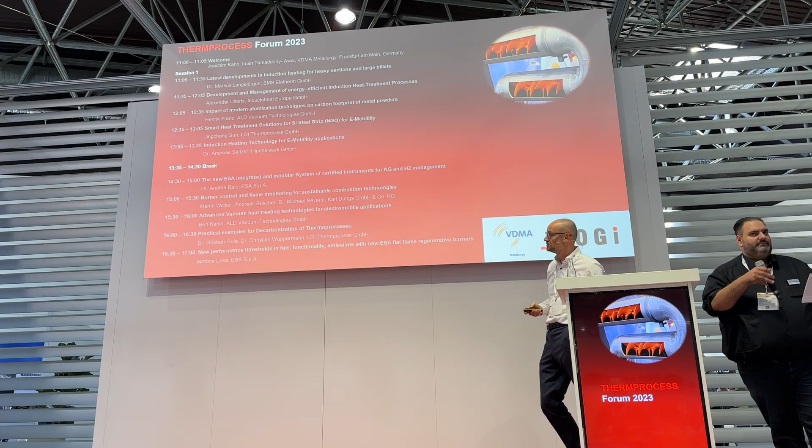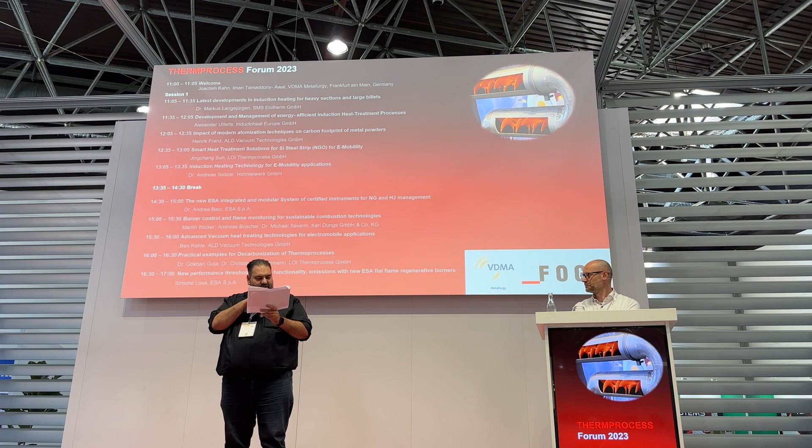Hello everyone, welcome back after our short break. And we continue with the second part of our symposium here. Our next speaker is Dr. Baio from ESA, Technical Department Manager R&D at ESA in Bergamo, Italy. He will hold a presentation about the new ESA integrated and modular system of certified instruments for NG and H2 management. You're welcome. Thank you very much.

So, I introduce myself a little. I'm the R&D and Technical Manager for ESA Pyronics. ESA is a company that is located near Milan. We are roughly 30, 40 kilometers from Milan. We are a combustion system provider. So, we can divide our production into parts. One is the equipment and one is the engineering.

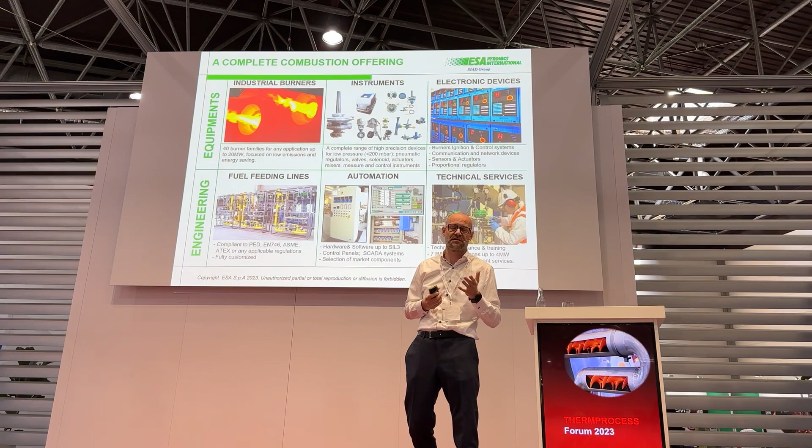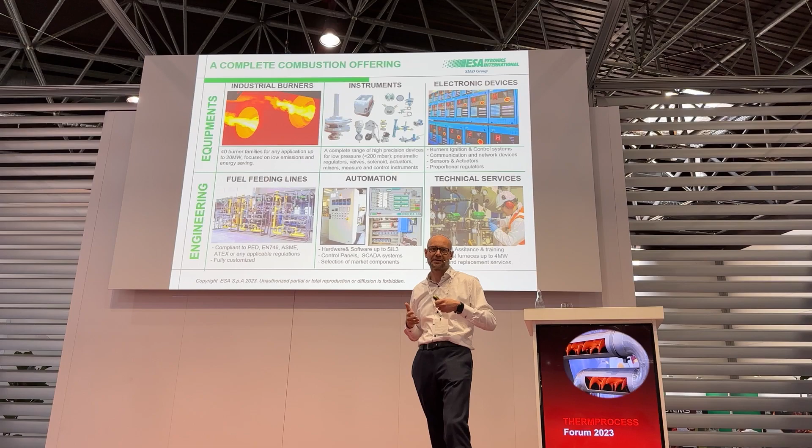We make a lot of equipment, devices that are used for the control of combustion of burners. Our core business is burners. We are a burner manufacturer. We make roughly 40 families of burners with different sizes. So you can imagine how many burners we developed in the past and how many burners we have in the catalog. From low temperature applications, bakery systems, 250 degrees, 300 degrees, up to 1500 degrees, so glass industries, for example. We are in all the fields of combustion except boilers. It's the only field that we don't cover.

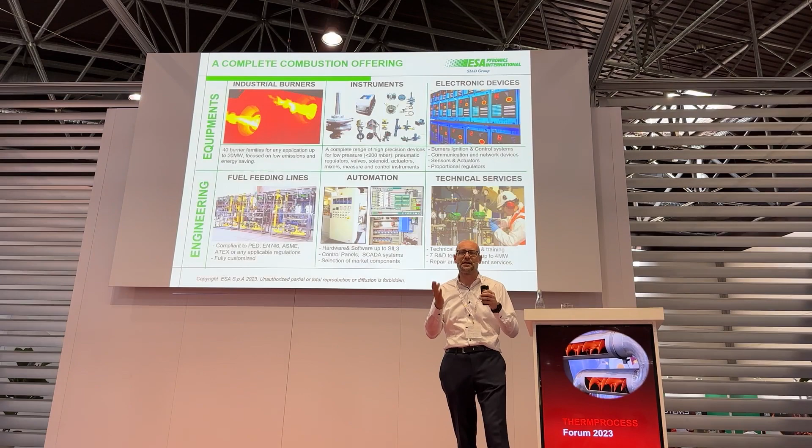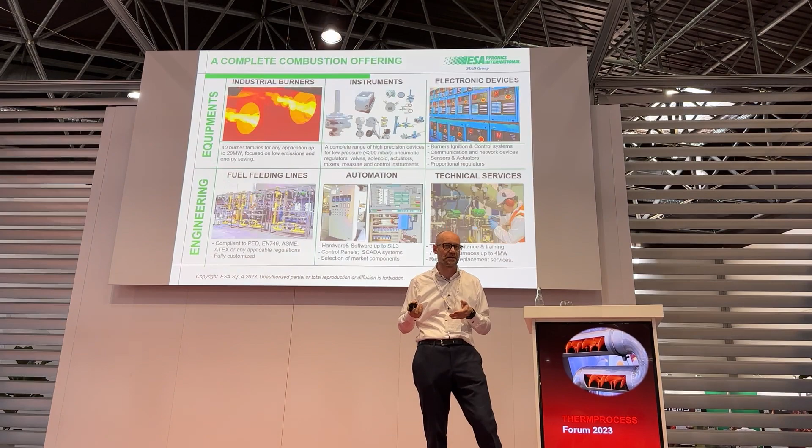Okay. According to the core business that is the burner, we made also other devices that control flow rate and pressure of air and in general fuel on the burner. So we have a complete range of devices like mechanical pressure regulators, adjusting flow control valves that are motorized and manual. We make orifice flow meters. We make mixers for premix applications, where we need premix burners, for example.

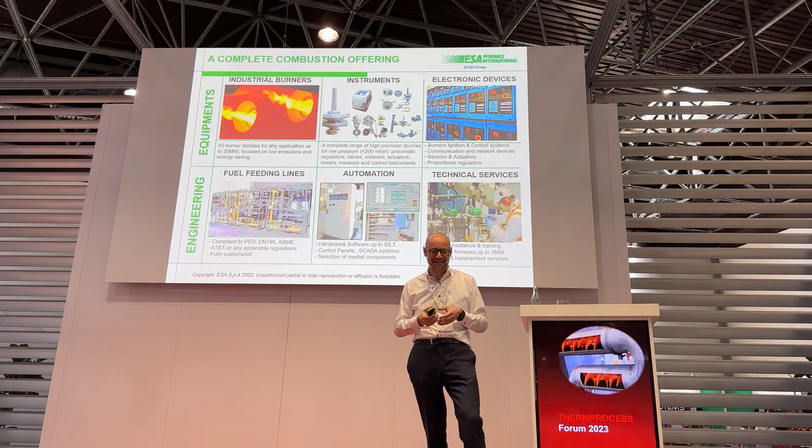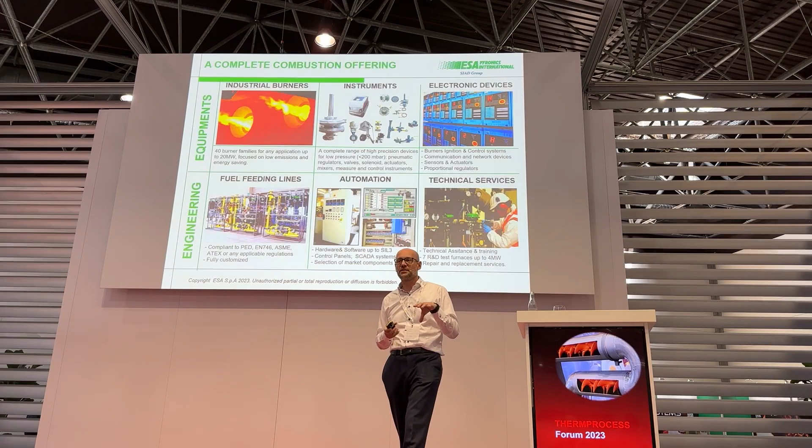We have also the electronic devices that I don't speak about because I'm a mechanical engineer. My colleagues are much better than me to speak about all the electronic devices. We make burner control units. We make pressure transmitters to control the flow rate and pressure on the furnaces. We make sensor actuators. We make UV scanners to control the flame signal on our burners, and we make also proportional regulators.

In the engineering side, we are also skid manufacturers, so we can provide complete skids. We make automation, so we make also software. We make turnkey plants on furnaces, and we have also technical services that provide post-selling assistance on the furnaces.

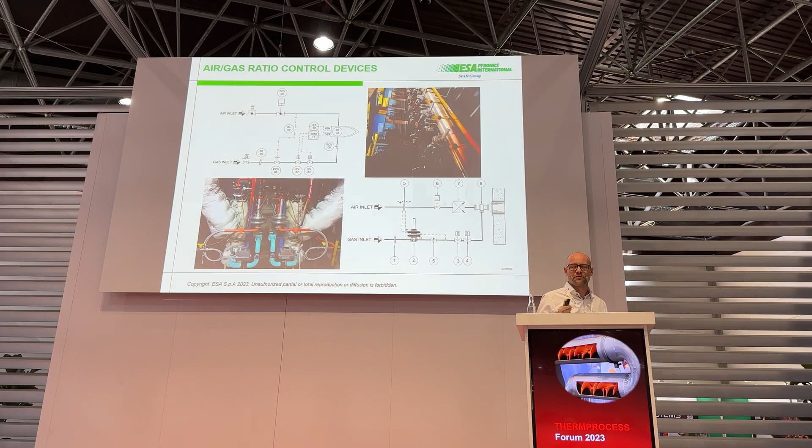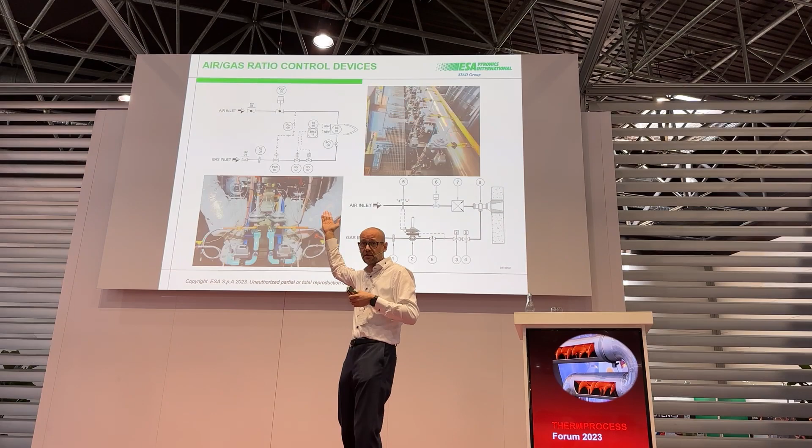I show you in this image two simple applications in single burner management. So we have an air line and a gas line that goes to the burner. These are two typical applications that we sell, managing the gas according to a pressure regulator. That can be a simple zero regulator in the upper example, or an air ratio control regulator in this example. The first one is the simple one, used for cold air, for example. The second one is used when we have preheated air, or strong variation of pressure inside the furnace.

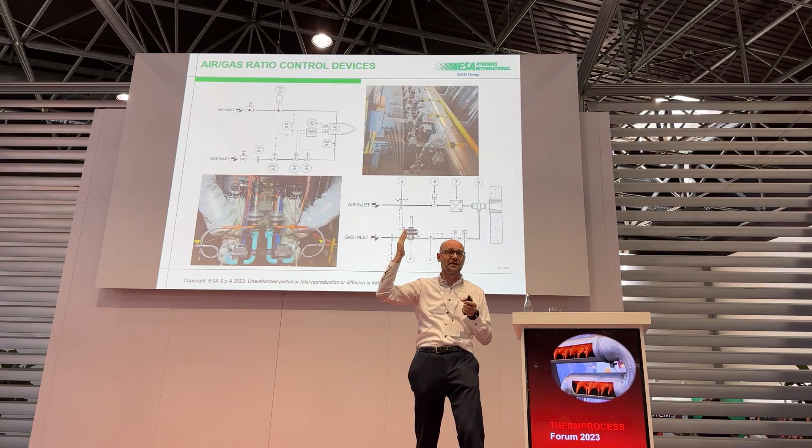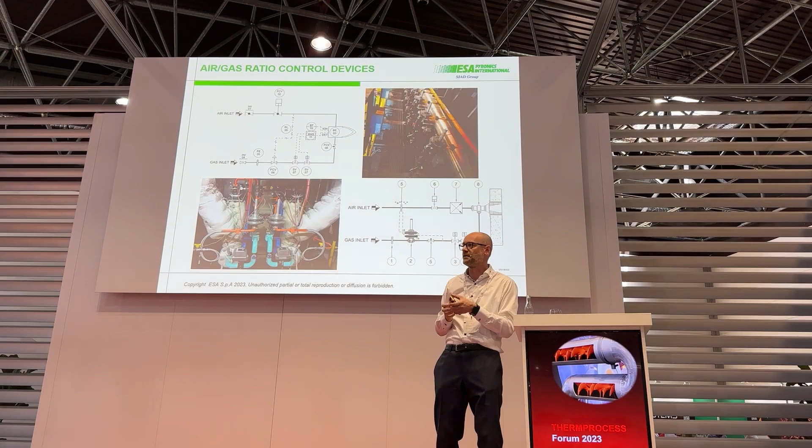But at the end, what we use for managing air and gas on the burners are these devices. So we have a ball valve in the inlet of the gas, a flow meter just to check the flow rate of gas to the burner. We have a pressure regulator. We have two solenoid valves according to the EN 746 standard and other standards, also the American one. We have the DMS and we have the burner, and the manual flow control valve for rating manually the flow rate of gas to the burner.

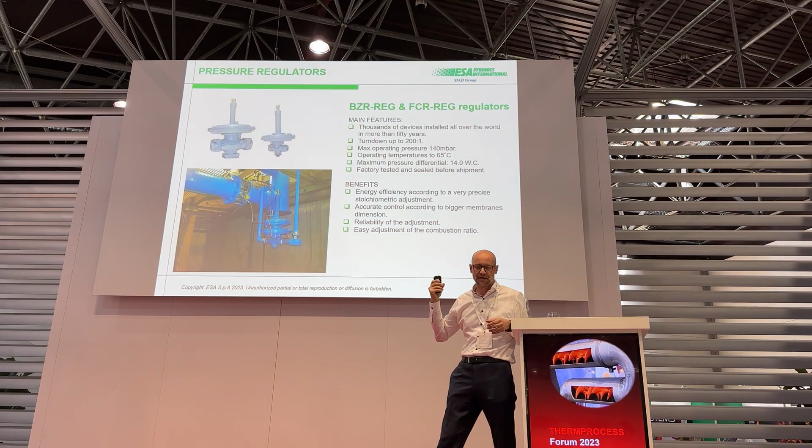This is well known on the market because it's, I think, 50 years that we sell this kind of pressure regulator. This is the old version, the version of 1950, 1960, just to tell you. We have thousands of devices installed all over the world. It's a very good regulator because of the big membrane, high sensibility in managing the flow from the maximum to the minimum rate of the burner.

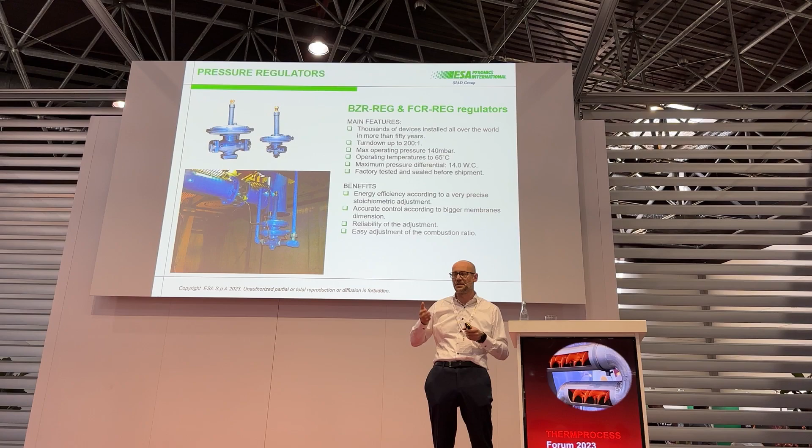We have an operating temperature to 65 degrees and a maximum differential pressure that is normally 10 millibars of delta P. The benefit is managing the right air and gas ratio of the burner. So with this kind of regulation, we can set maximum flow rate and minimum flow rate of the burner, keeping the ratio in a proper way in all the field of regulation of the burner.

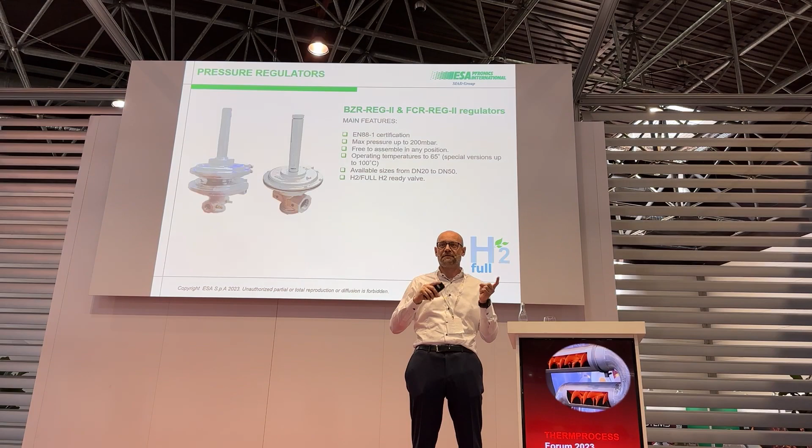This is the actual regulator. In 2014, we managed to update the regulator according to the new gas appliance directive. It is now in Europe gas appliance regulation. And we certified these regulators for the EN 88-1, so the pressure regulators up to 500 millibars of delta P. In this new version, we updated the maximum pressure that was 140 millibars and now is 200 millibars.

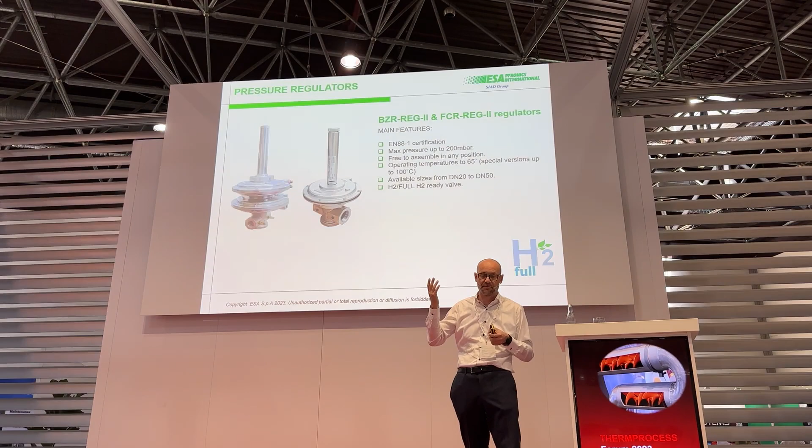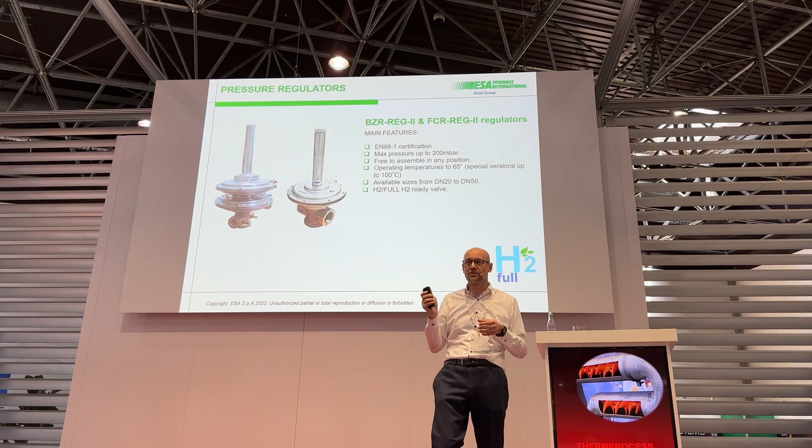And operating temperature up to 65 degrees, but increased also at 100 degrees. We have a special version for preheated gas. And the size from 3/4 inch to 2 inches is certified to EN 88. These regulators were updated 2 years ago to work with full hydrogen. So according to the green transition, we tried to take all the devices that now are managing natural gas or other types of fuel with hydrogen, so blending from 10% up to 100%.

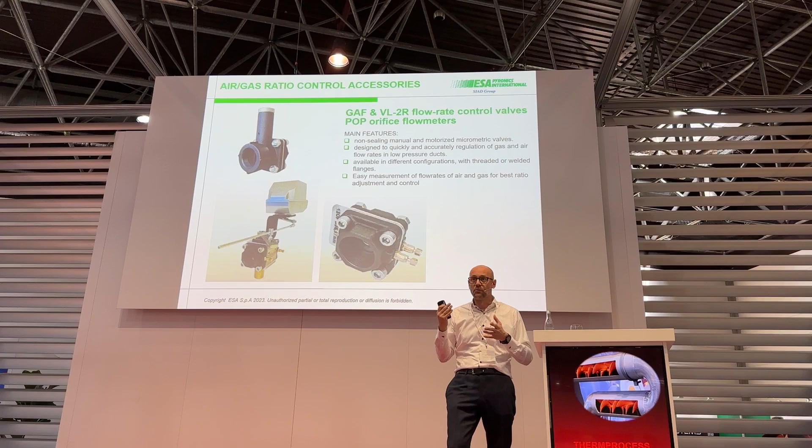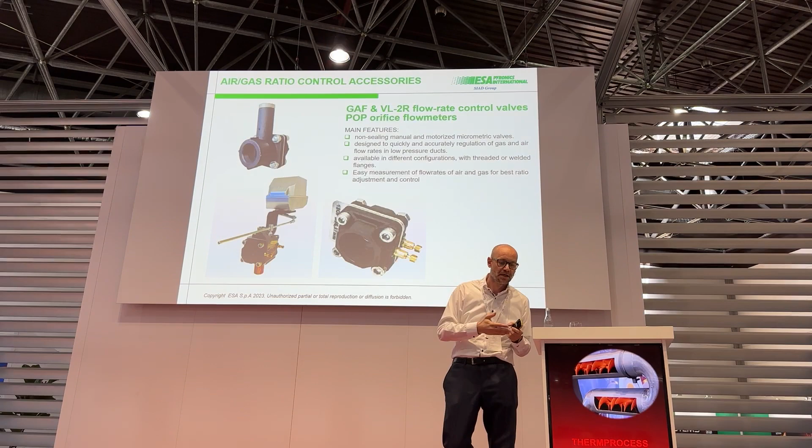In parallel with the pressure regulator, we have also the flow control valve that can be motorized, like the VL-2R valves that you find on the catalog. That is a micrometric motorized valve with different motors according to what you can do. You can do off min max, you can do proportional mode, you can do 4-20 milliamps. We have a orifice flow meter to check the flow rate of the burners. We have also a manual gas adjuster. So this is the technical background where we started from to develop a new idea of the devices that we are using on the gas line to the burner.

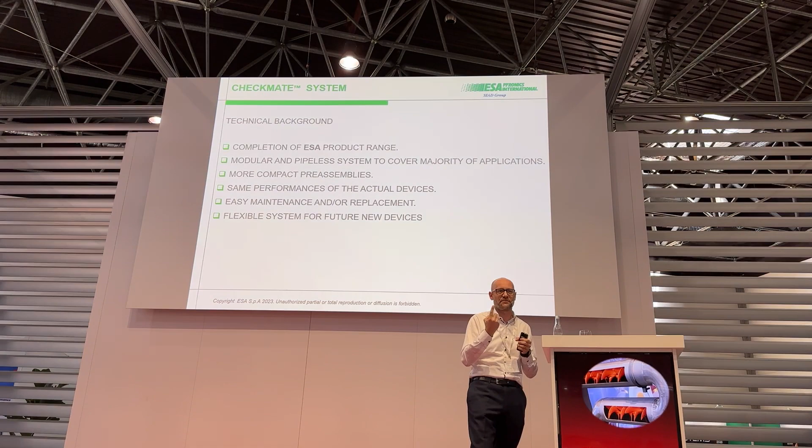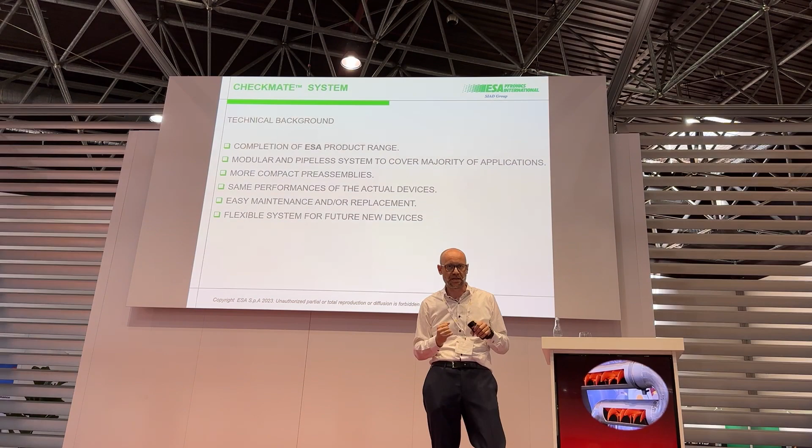So the first request from the market, but also from our side, was the completion of the ESA product range, where the only devices we didn't make up to now were solenoid valves, so shut-off valves. So we decided to develop the shut-off valves by ourselves. Then to have a system that is as pipeless as possible to decrease the cost in assembling, so threaded connection, welding connection, and so on. So this is the second point.

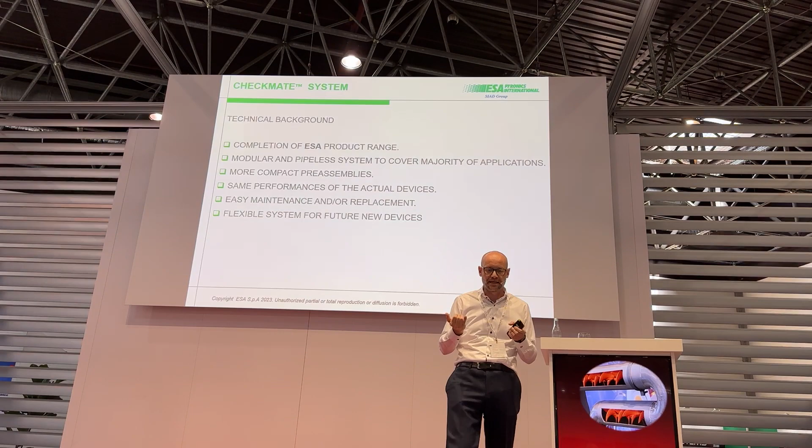More compact, because every time the requests are, I have a building like that, but the space for the combustion system is always less and less. So we started from that point to study something more compact than the actual assemblies. Then easy maintenance and replacement are fundamental things to respect when we design and maintain a gas line, and then a flexible system for future devices. So we started with a new engineering of this kind of devices, thinking also about new devices that can come in the future.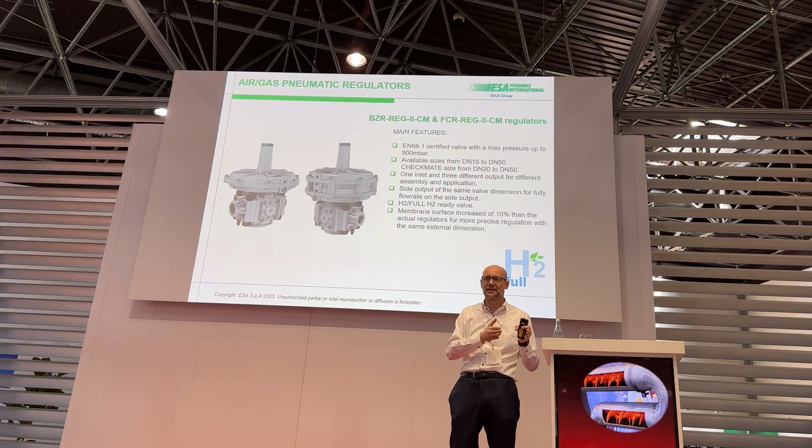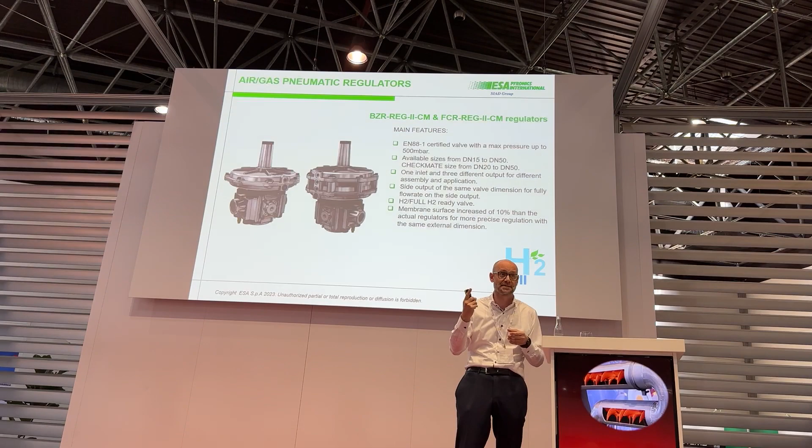First modification. This is the actual BZR and FCR. So we are speaking about pressure control valve and air gas ratio control valve, redesigned according to the new CheckMate system that we will see after. So they will be always certified for EN 88-1, but the maximum pressure will increase to 500 millibars. And this was one of the requests because it goes in parallel with the solenoid market.

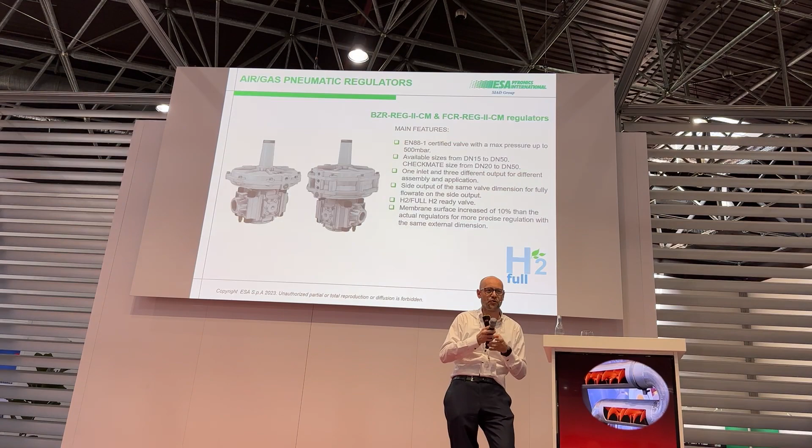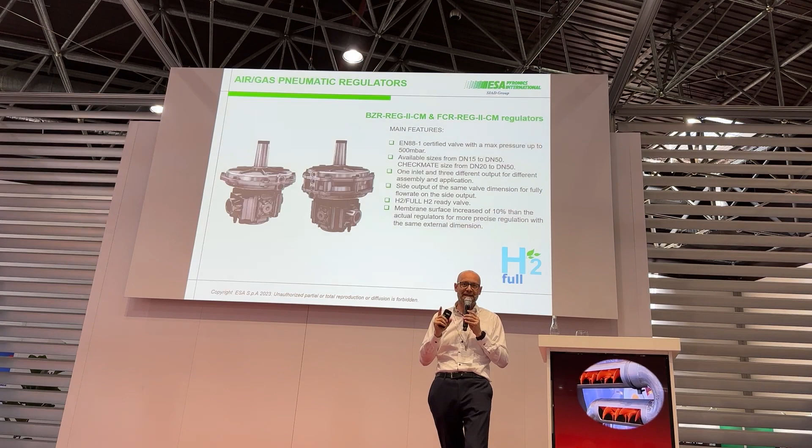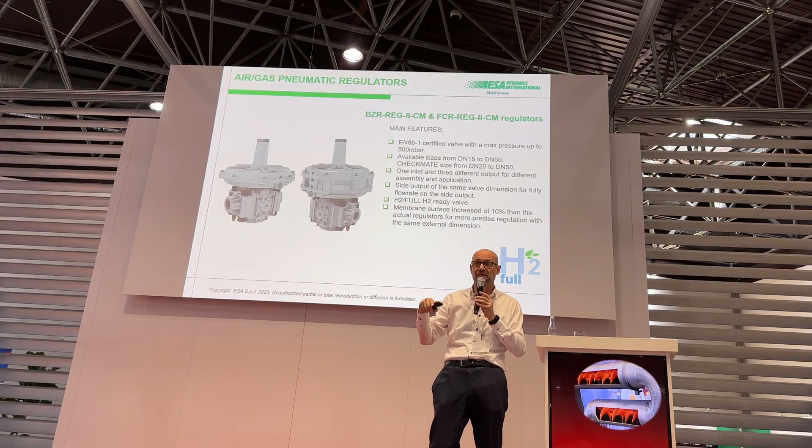Okay, the availability of this regulator will be from DN 15, that means half an inch, that now we don't cover, up to 2 inches, threaded connection in all the sizes. One inlet and 3 different outputs. The only difference between the old one and the new one is the body. The body is the novelty of all this system. It's a body that has 4 equal faces, one for the inlet and 3 other outlets, so left, right, and straight on, with the same geometrical shape. So it means that we can exit from that valve where we want, and this is a novelty for the market.

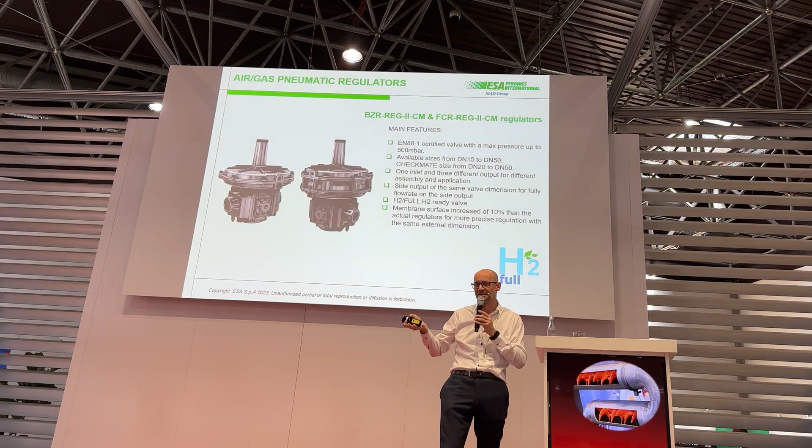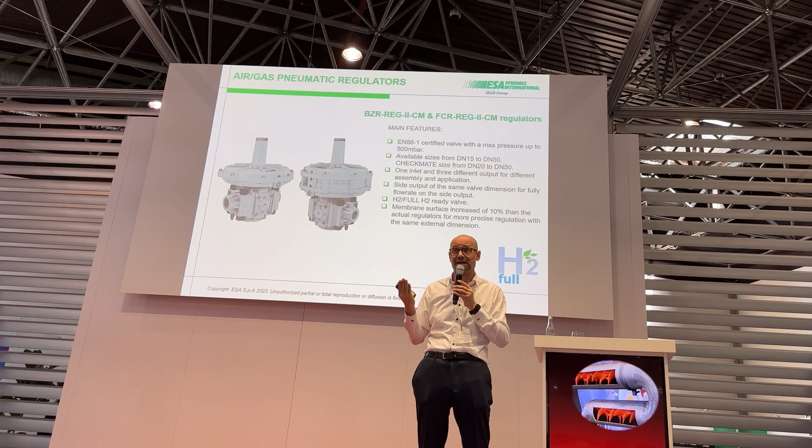It will be also full H2 ready, according to, I don't know which product standard, because actually we don't have any product standard that covers devices for hydrogen use. It will be something that will arrive as soon as possible, I think and I hope. And then we will increase the membrane by 10% while keeping the same external size of the regulator. So we have more surface internally on the membrane, so more sensibility on the device, but the same geometrical dimension externally.

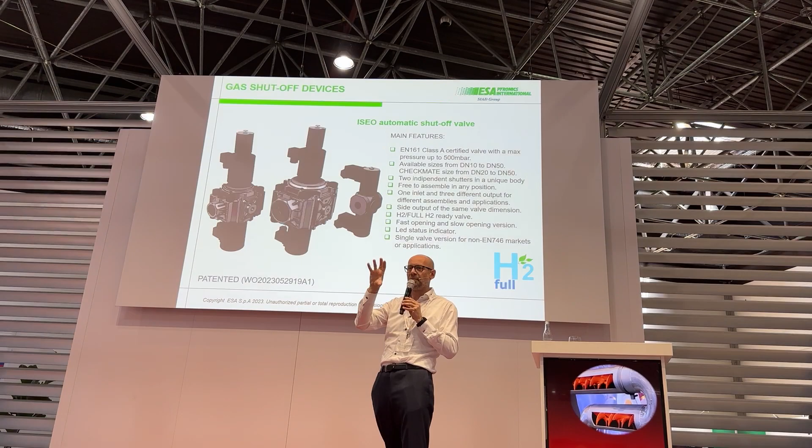This is the new product from ESA. We started to develop a solenoid valve. It's patented, a new patent. Now we are in the national phase. Which is the novelty? To have one body of a single valve, but with 2 shutters. So they are 2 independent valves: the first shut-off valve and the second shut-off valve, mounted in the same body. This is very important because the dimension of the valve is comparable to a single valve dimension.

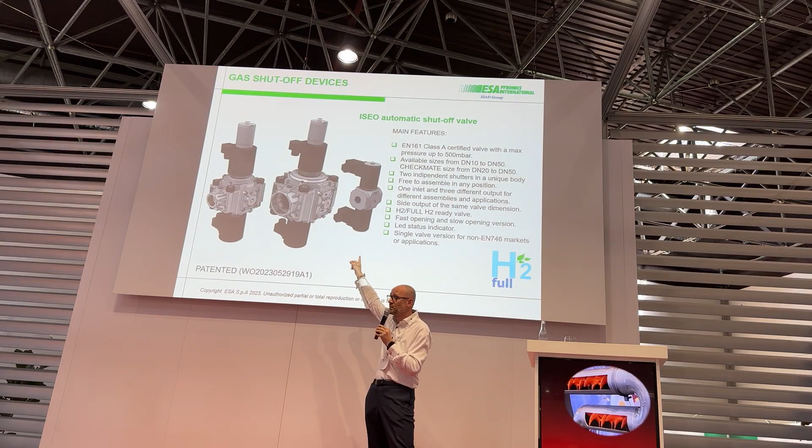You will see here the size will start from 3/8 of an inch and will arrive to 2 inches. We have a small one, this one, 3/8 and half an inch. And we have the CheckMate valve, the other 2, that start from 3/4 and arrive to 2 inches.

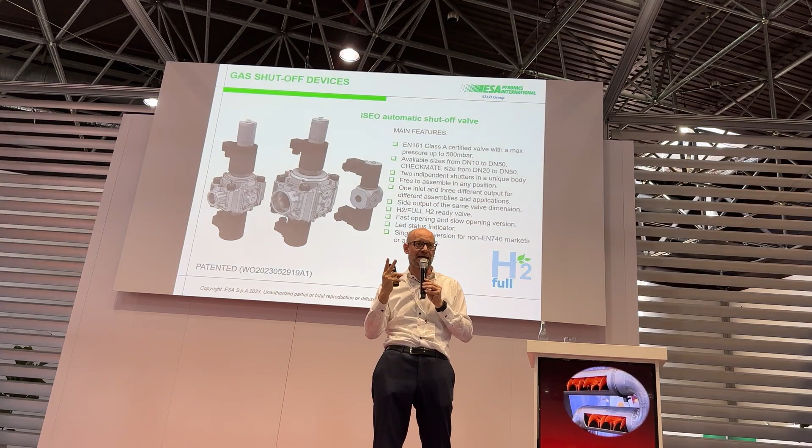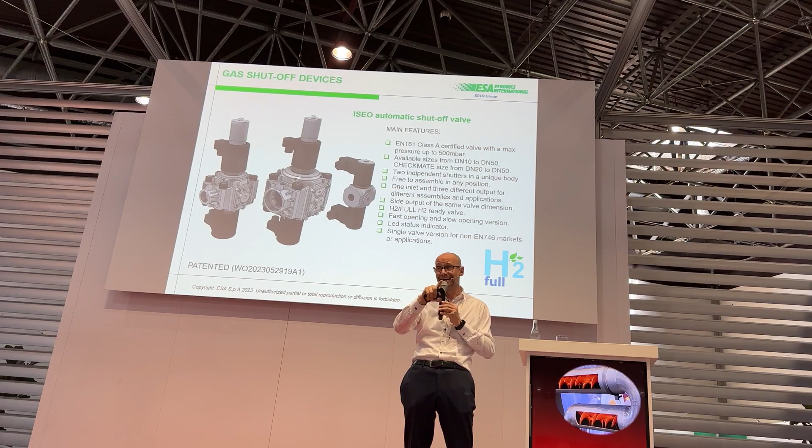Which is the big novelty that the market doesn't have now: we can couple 2 valves of the same size. We are used to seeing solenoid valves that have one bypass exit that normally is smaller than the main dimension of the valve. With this new system, we can couple 2 valves of the same size, so the exit on the side and the exit in the straight direction have the same dimension. So if we choose, I don't know, a 2 inch valve, we can exit with a bypass of 2 inches and not with a bypass reduced to 1 inch.

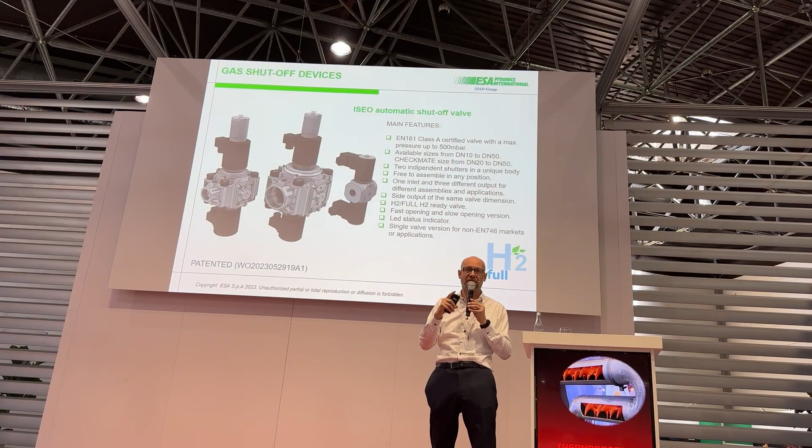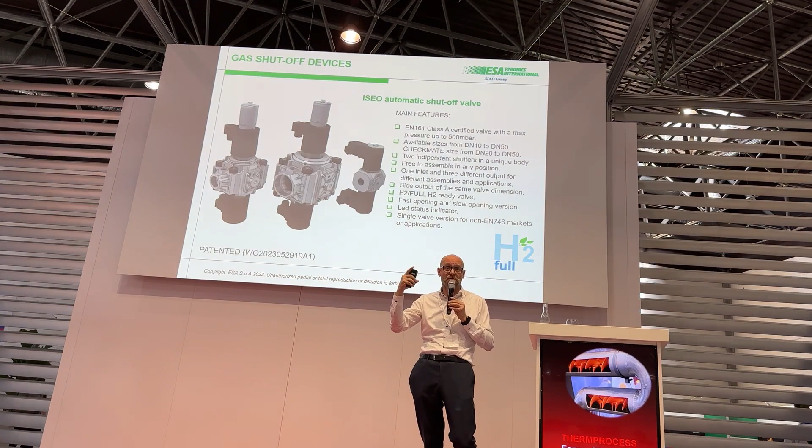The valve will be certified EN 161 Class A and will be certified for the American market. So also for the American market, we will have a visual indicator up to over 44 kilowatts, if I remember well, and the proof of closure up to more than 120 kilowatts, if I remember well. All the valves, as the pressure regulator, will be ready for hydrogen use, so in blending or pure hydrogen. And we will have a connector with an LED indicator just to check if the valve is on or off. And we will also have a slow opening system for the slow opening valve, so one fast and one slow.

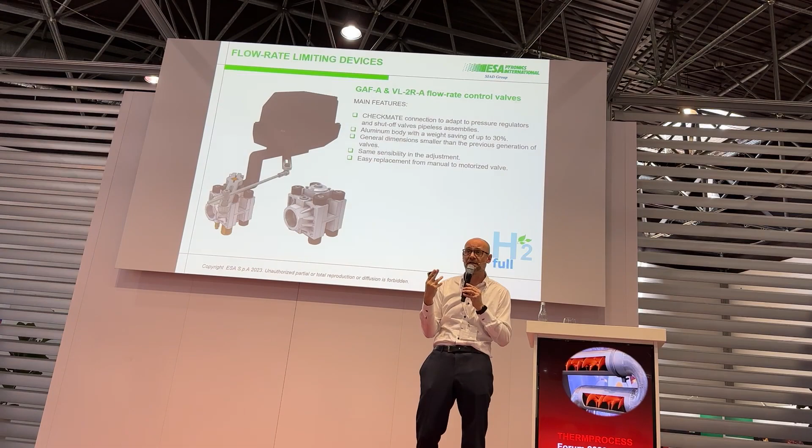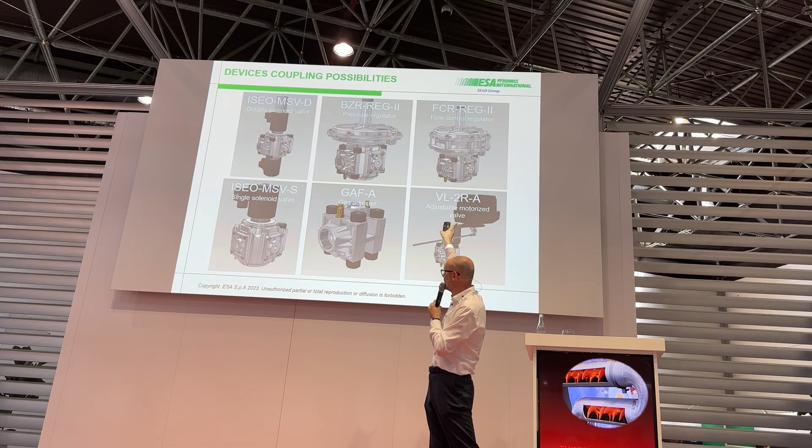In the same way, we took the standard product that is the gas adjuster, manual or motorized, and we used the same system of coupling with the valves in the motorized valve and in the gas adjuster. So, just to enter into the core of the discussion, these are the 6 devices that we developed. We have solenoid valves, double valve, the single valve, we have the pressure regulator, zero governor, we have the air gas ratio control regulator, so the double membrane regulator, we have the manual gas adjuster and we have the motorized gas adjuster.

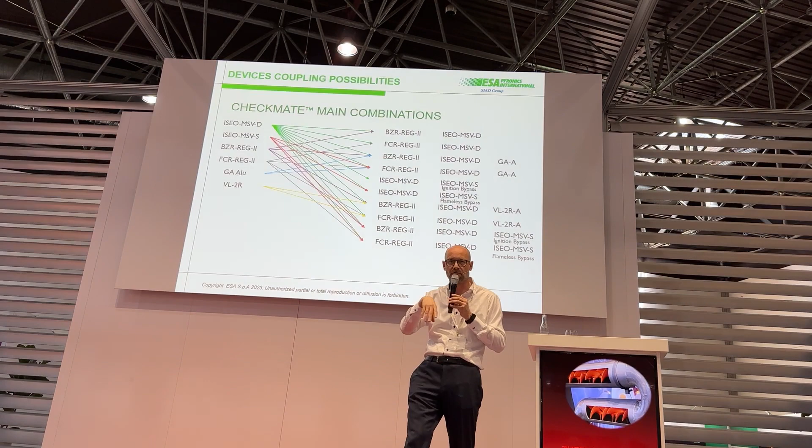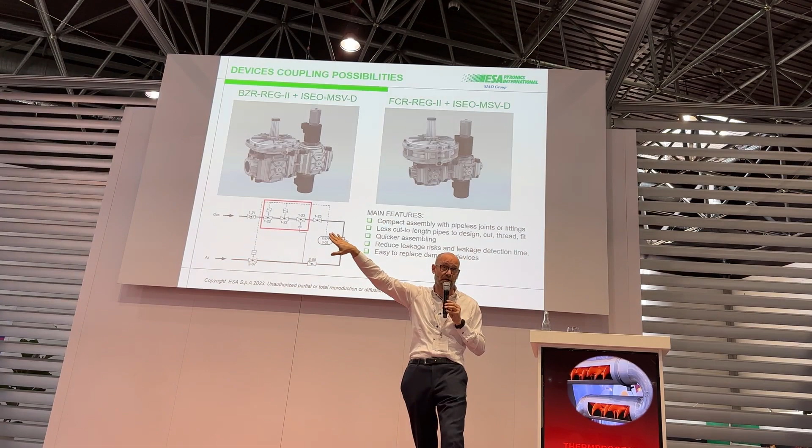Which are the combinations? These are one part of the combinations that you can do. Now I will show you some combinations according to P&IDs that we can find in EN 746 or ISO 13577-2, just to have an idea what we can do. First one, you see the P&ID of the standard: 2 solenoid valves and 1 pressure regulator regulated by a pressure impulse line coming from the air. In our philosophy, we prefer to have the pressure regulators upstream of the valves. So in our assembly, we will put the pressure regulation upstream of the valves, and we have 2 valves, EN 161, downstream of the pressure regulator.

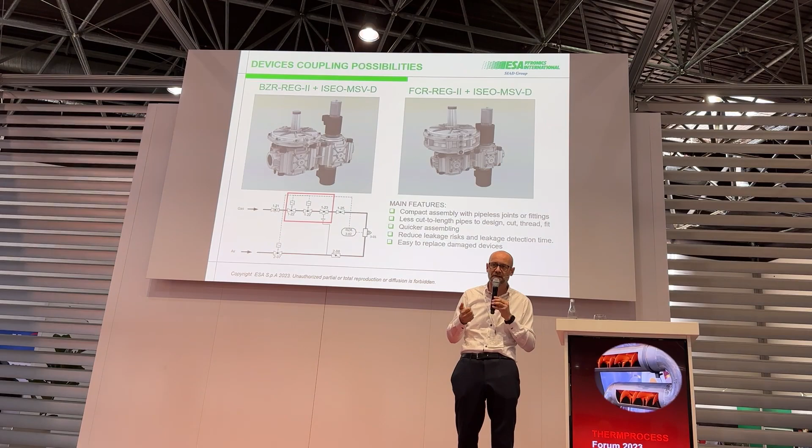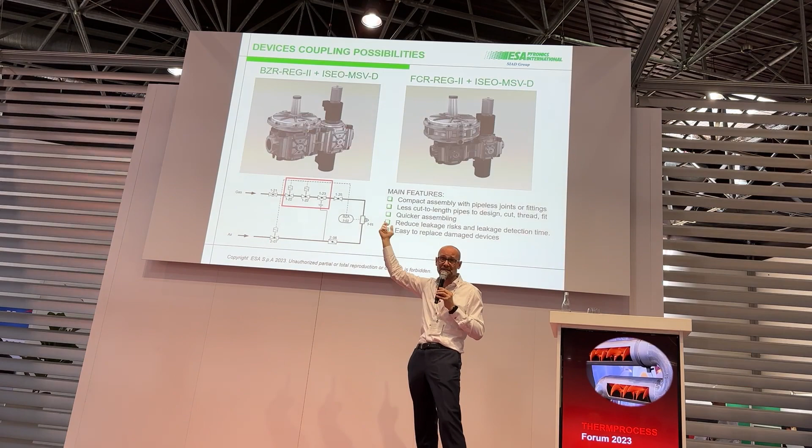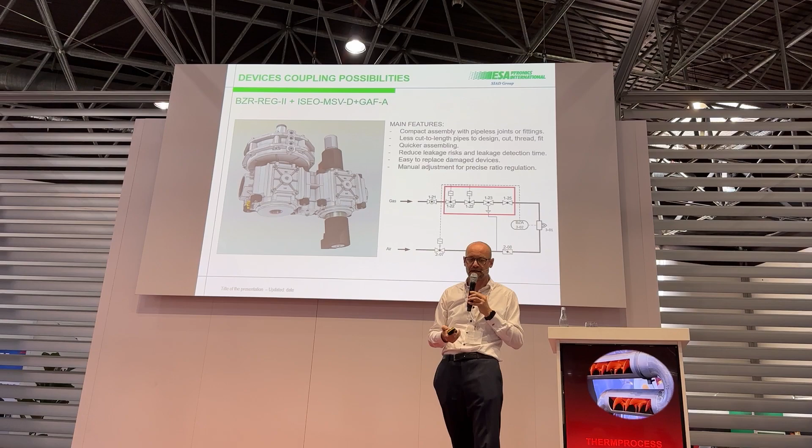There is a spacer in the middle. Why the spacer? Because we kept the dimension of the membrane as in the old pressure regulators that we have now in the catalog. So compact assembly without any pipe joint or fitting. Consider that we are coupling 3 different devices in a system that has a dimension of 200, 250 millimeters, not more. So we have a quicker assembly, just flanges and nuts and bolts. We don't have to use any sealant on the threads, except the inlet and exit of the devices. So we have reduced risk of leakage from the many more connections that we would have to do, and we have an easy to replace device. So if we have a break in the pressure regulator, we take out the pressure regulator, we put in the new one, and we close again. So in very few minutes we can make a modification, a replacement.

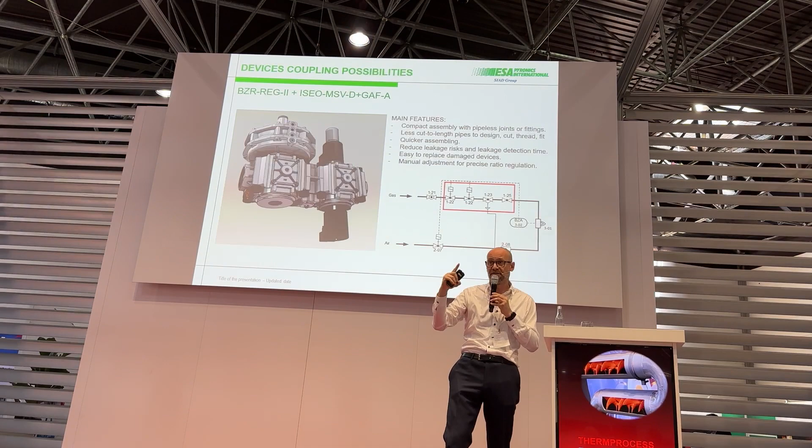This is the same with a gas adjuster. You see that there is one other device, a gas adjuster, that can be used instead of a spacer. So pressure regulator, gas adjuster, and the 2 solenoid valves. The dimension of the assembly is the same, but we have one more device in the middle. And this is the example. This is, I think, an easy assembly to do. Now we can see different assemblies that are the novelty of the CheckMate system. So this is a standard one.

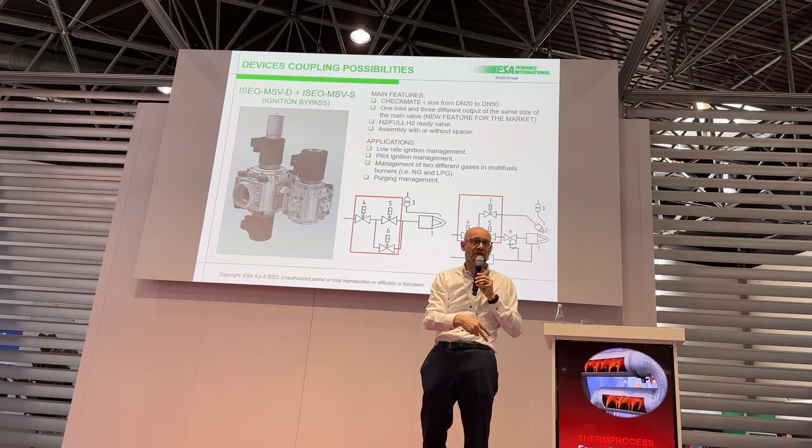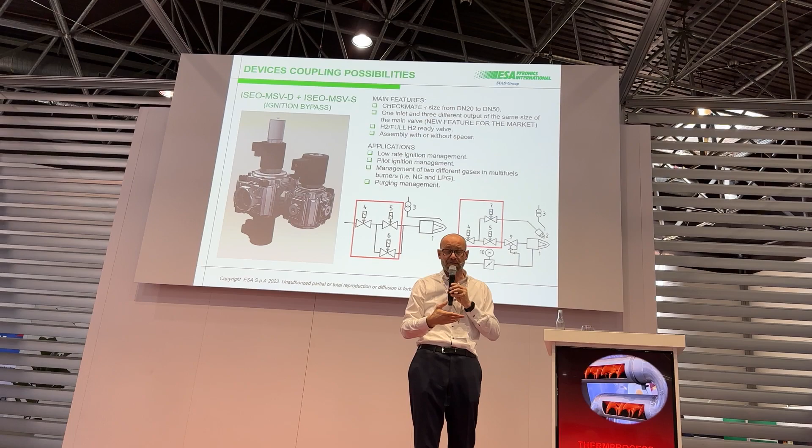2 solenoid valves of the main dimension, main line, and a bypass with a smaller dimension. You can see this kind of application we can do for reduced rate ignition according to EN 746, or to feed a pilot burner when we have a pilot burner and main burner. So in this way we have a smaller valve as a bypass that feeds the pilot burner, or that can make a reduced rate ignition of the burner.

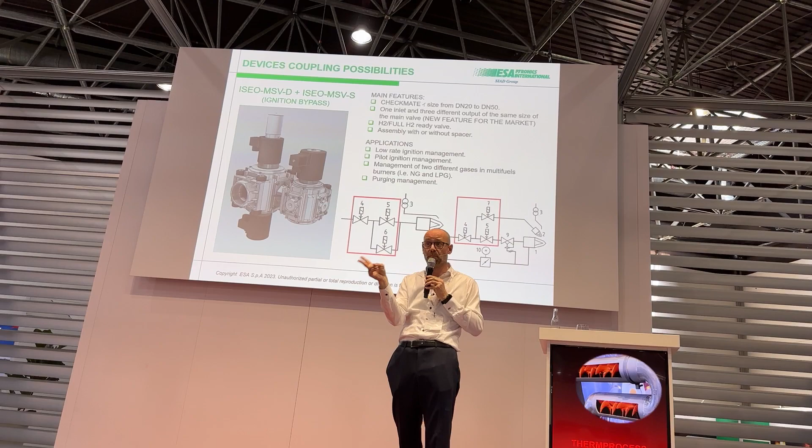Or for example, we can use it with 2 different fuels. An example that is very current given the cost of natural gas and LPG. I can make a line for natural gas, the big one, and a line for the LPG gas. We will use the first valve that opens for both lines, and we can choose by the PLC the second or third line if we use natural gas or if we use LPG. Okay?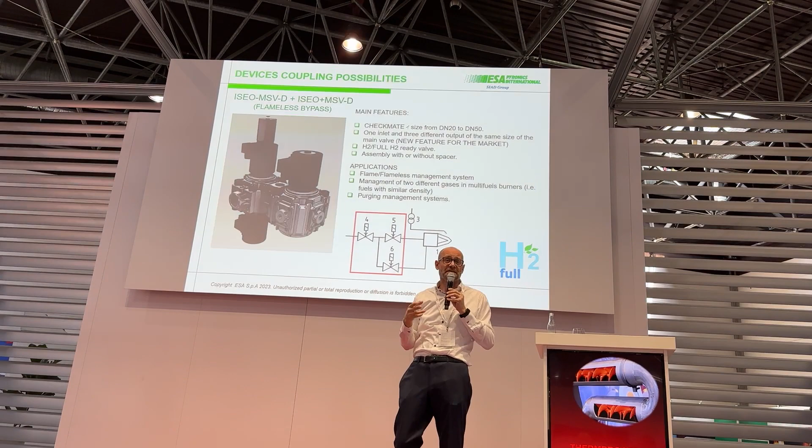This, you can see here the novelty. We couple 2 valves of the same size, with or without the spacer. There is a spacer in the middle. The spacer is needed if you need to go parallel with the 2 lines to give more space between the 2 lines. But we can couple directly the 2 valves.

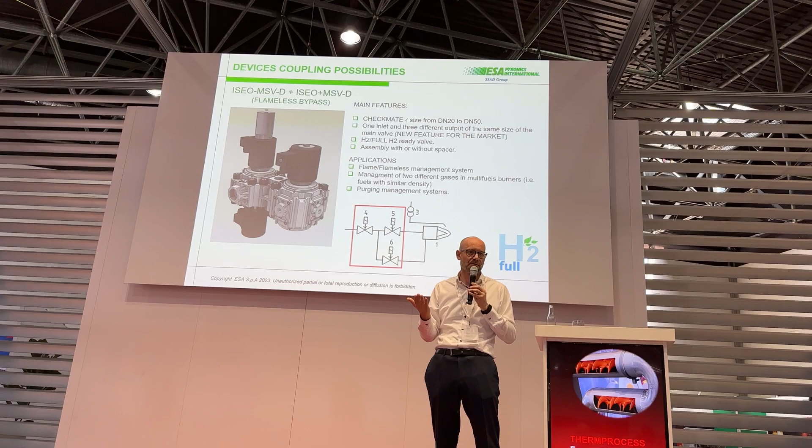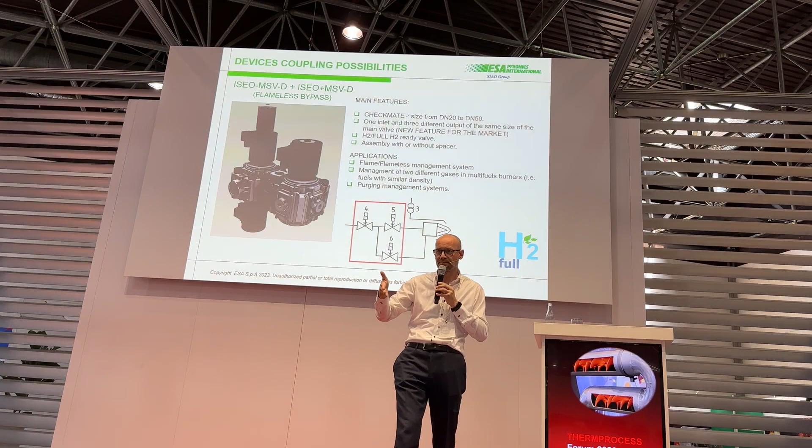So, to save space, which is the main application of this. You can imagine about the NOx limit that we have to respect now and in the future. Flameless combustion will be a fundamental way to make combustion of the furnaces, and in this way we can manage flame and flameless combustion. So we have a bypass of the same size as the main one, so we adjust one part, the main one, of the flame mode, and the second one in bypass of the flameless mode. We don't have any problem in flow rate because the sizes are the same on the 2 lines.

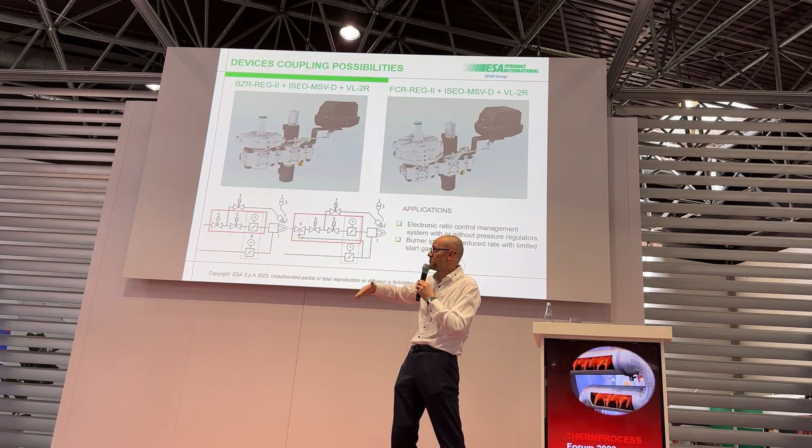Here we have something a little more complicated. So in electronic ratio control management, we have a zero governor. This is our philosophy. Also in the pure electronic range, you take out the zero governor and you can use the 2 solenoid valves with the motorized valve. And you can read the flow rate of gas and you adjust with the motor the flow rate, the right flow rate to the burner.

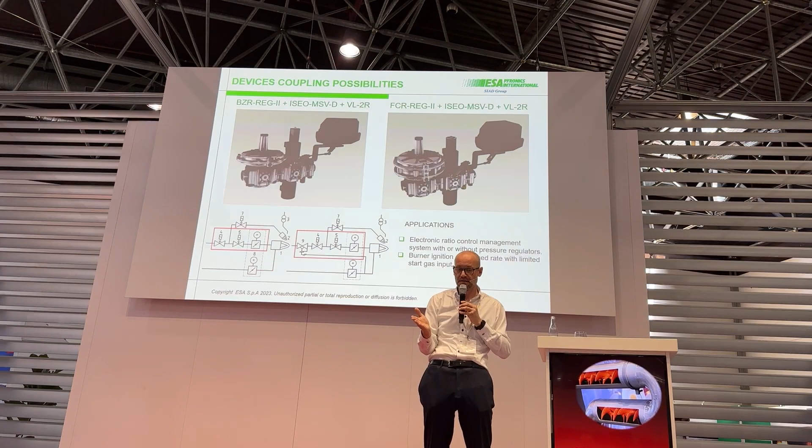Normally our philosophy is to use everywhere a pressure regulator and then to have a motorized valve that makes the fine regulation to the right lambda. And in this way you see two different things: one is the pressure regulator, and the second is the air-gas ratio regulator.

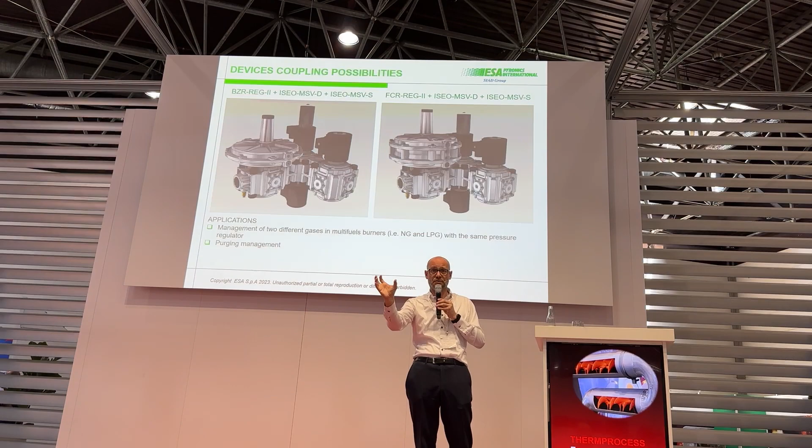Here you can see an application where you can manage two different gases in multi-fuel burners. So we have one unique pressure regulator in the inlet and two lines that go to the burners, one rated on one fuel and the second rated on the other fuel.

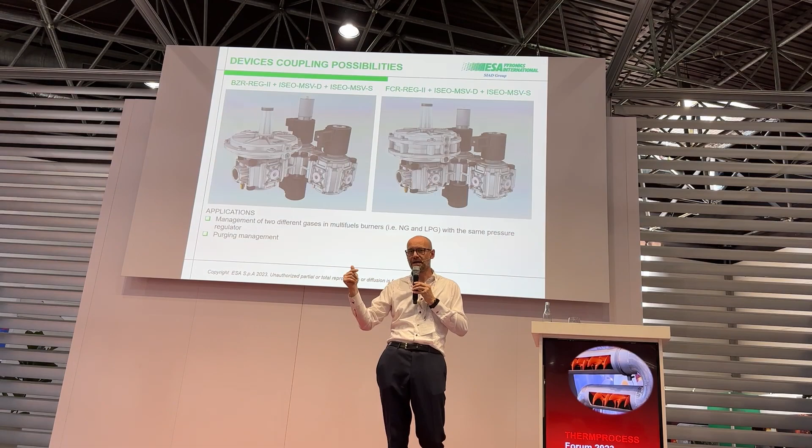Or, for example, another application can be a purging management. I assemble the valve in the contrary way, so I enter in the middle of the two solenoid valves and I can make a purge. I close the first valve, I open the second one and I enter with nitrogen, for example, for purging the line. It can be another solution that we can make with this kind of system.

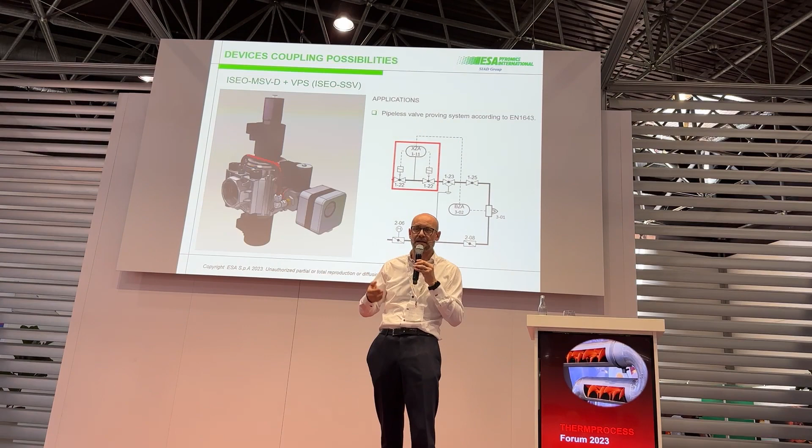This is a simple pipeless valve proving system according to the EN 1643. So we have a double solenoid valve, and in the middle, on the lateral flange, we will put a small solenoid valve with a pressure switch that is linked to the valve proving system, and we can check the leakage of the two main valves to the burner.

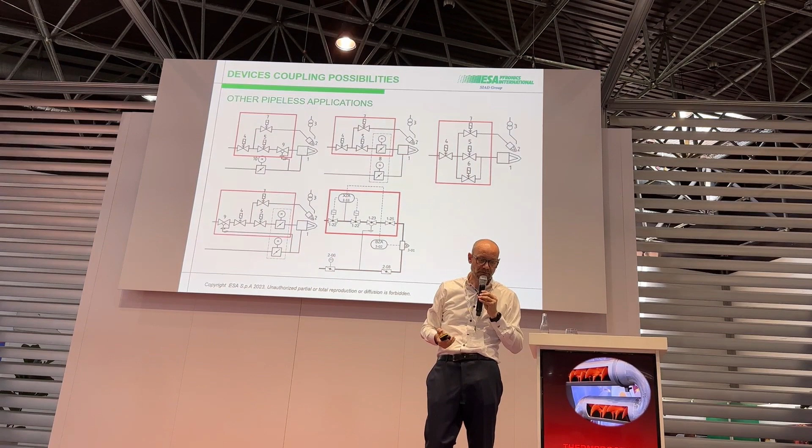Other pipeless applications, I didn't put any image, I put only the P&ID. We can make different applications, every time more complicated, but we can cover coupling 6 different devices, a lot of applications.

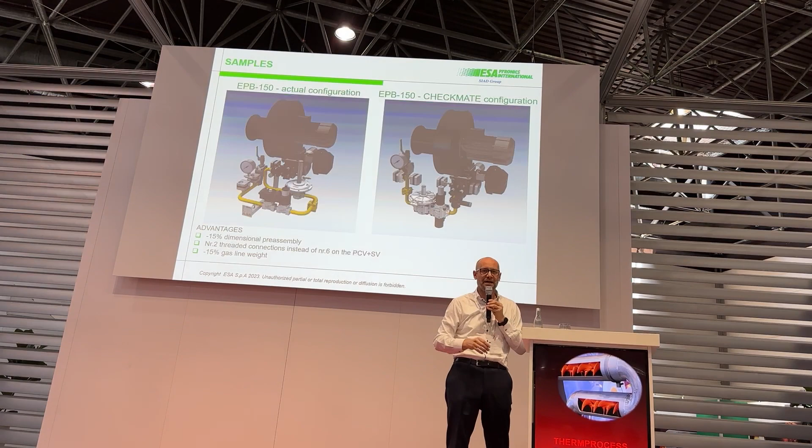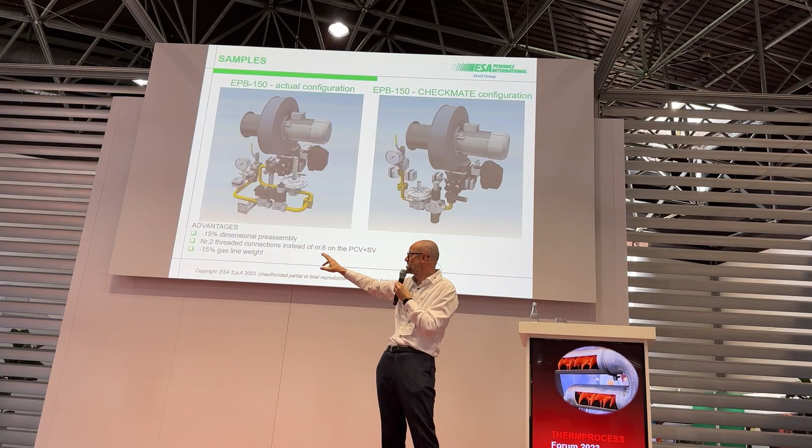Just to give you an idea of what we save in space, threads and connections, this is an EPB burner. You can find the new one, the right one, on the stand, but it's a comparison with the old one. So same devices: the ball valve filters, pressure gauge, 2 pressure switches, the 2 solenoid valves and the zero burner. And now this is the new line.

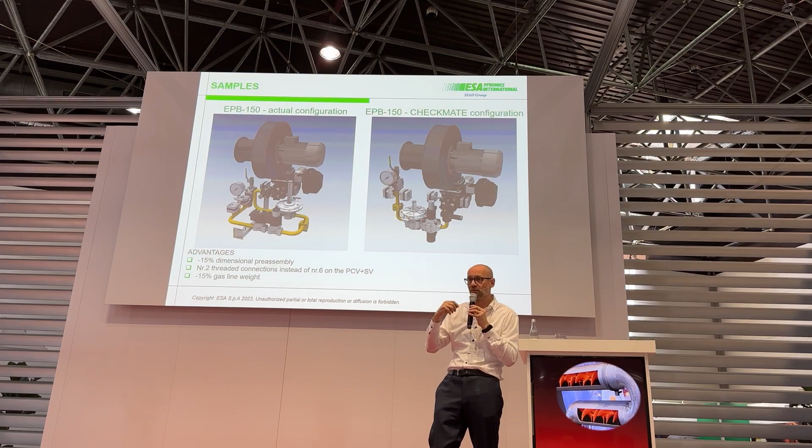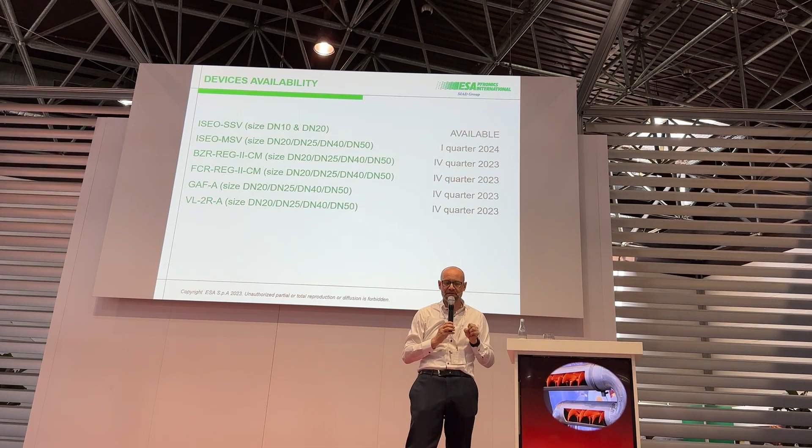Availability - this was a strong discussion internally. So the ISEO-SSV, the small safety valve, is already available in the size of 3/4 inch and 3/8 of inch. The ISEO-MSV, the CheckMate system from 3/4 to 2 inches, will be available in the first quarter of next year, 2024. The BZR and the FCR with the new design of the body will be ready for the 4th quarter, so for the end of this year. The same for the gas adjuster and the same for the motorized valve. I think, okay, thank you very much.